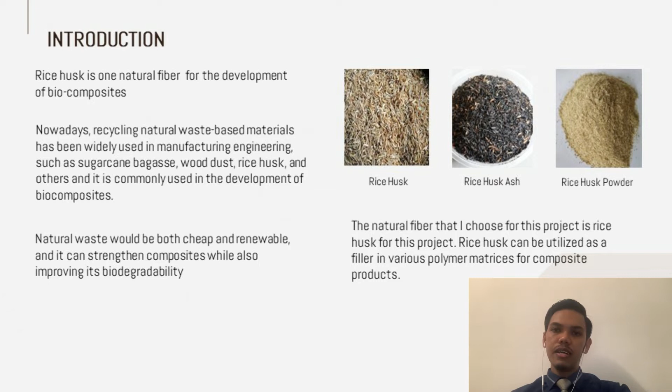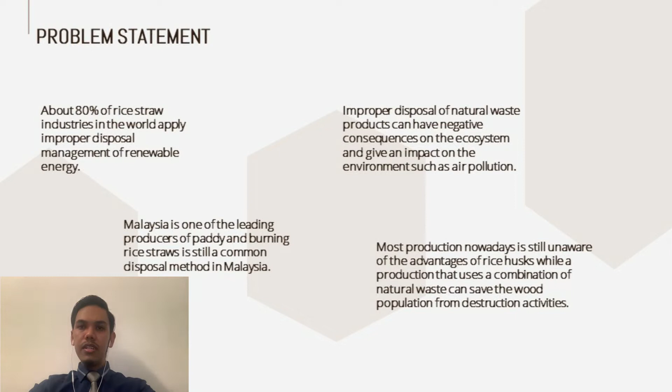And lastly, most production nowadays is still unaware of the advantages of rice husk, while production that uses a combination of natural waste can save the wood population from destruction activities.

Okay, next I will continue with the research objectives. The main objective for this project is to fabricate rice husk reinforced by epoxy resin with different ratios, divided into 3 ratios, which I will explain later in the scope of research. Next, to establish the standard size of specimen suitable for the mechanical testing, and lastly, to investigate the mechanical properties of rice husk reinforced by epoxy resin.

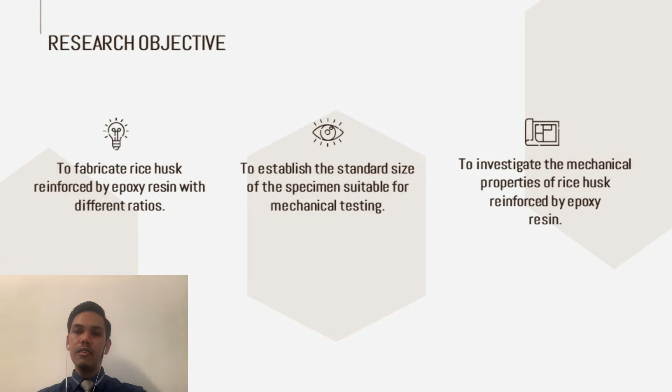Okay, next I will go for the scope of the research. The scope of the research is to fabricate the rice husk reinforced by epoxy resin, which I shorten to RHER, form the fabricated materials into testing specimens, and investigate the mechanical properties of the fabricated materials using tensile, flexure, and impact tests.

Next, the mixed composites were fabricated using the hand layup technique to produce 3 eco-friendly ratios: 60% rice husk and 40% epoxy, 65% rice husk and 35% epoxy, and lastly 70% rice husk and 30% epoxy.

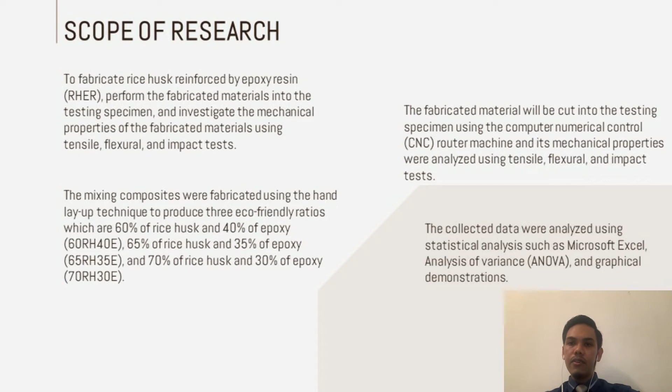The third scope is that the fabricated material will be cut into testing specimens using a computer numerical control (CNC) router machine, and its mechanical properties analyzed using tensile, flexure, and impact tests. And lastly, the collected data will be analyzed using statistical analysis such as Microsoft Excel, analysis of variance (ANOVA), and graphical

demonstration. Okay, these are some of the literature review findings related to my final year project topic. In this slide, I attached 4 different authors with their findings and research, and each of them shares the same result. The results state that impact strength and composite hardness increase steadily when using rice husk. Rice husk also has a significant contribution in improving mechanical properties.

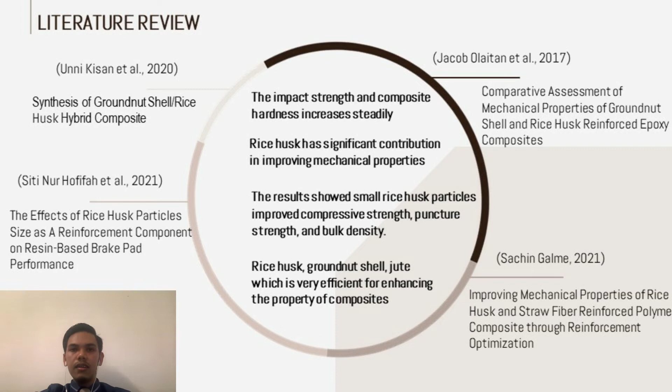The results also show small rice husk particles improve compressive strength, puncture strength, and bulk density. And lastly, rice husk, groundnut shell, and jute are very efficient for enhancing the properties of composites.

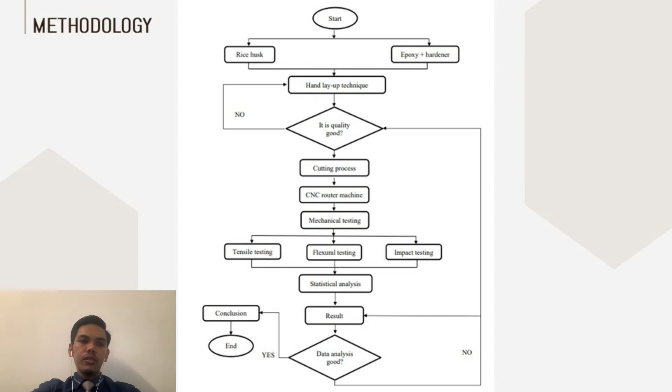Okay, next I will continue with the methodology, and in this slide I will show my process flowchart. Firstly, rice husk will be mixed with epoxy and hardener using the hand layup technique, and if the quality is good, we will proceed with the cutting process using the CNC router machine. Next, we will go for mechanical testing, divided into tensile testing, flexural testing, and impact testing, and we do some statistical analysis. If the data analysis is good, we will go for the conclusion and end the process.

For the tensile samples, we will use a universal testing machine in accordance with ASTM D3039, with 120 mm by 20 mm and 3 mm thickness. The quantity for tensile samples will be 15 samples for the 3 ratios. Next, for flexural samples, we also use a universal testing machine in accordance with ASTM D790, with 120 mm by 20 mm and 3 mm thickness. We will also produce 15 pieces for the 3 ratios.

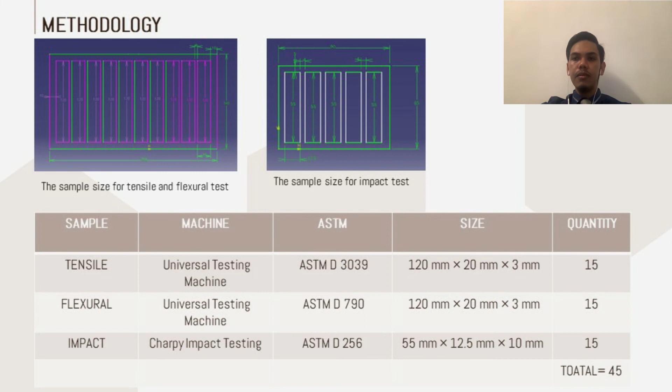And finally, for impact samples, we will use Charpy impact testing in accordance with ASTM D256, with 55 mm by 12.5 mm and 10 mm thickness. The samples for the 3 ratios will be 15 samples. The total will be 45 samples.

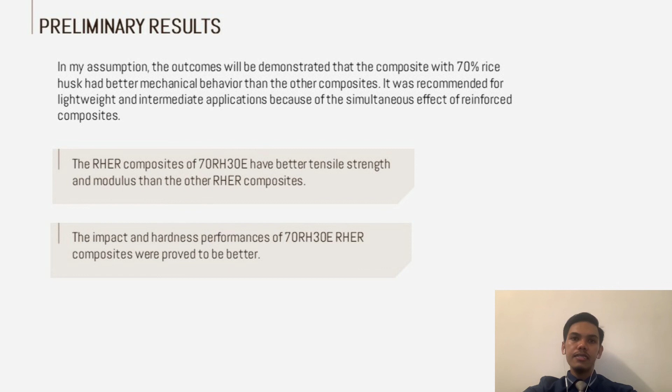Okay, for the preliminary result, in my assumption, the outcomes will demonstrate that the composite with 70% rice husk has better mechanical behavior than the other composites. It is recommended for lightweight and intermediate applications because of the simultaneous effect of the reinforced composite. In this slide, I stated that 70% rice husk will be better in tensile strength and modulus than the other composites. I also state that the impact and hardness performance of the 70% rice husk composite will prove to be better than the other composites.

Finally, we go for the conclusion. To achieve all the project goals, all of these procedures and preparations must be completed correctly and in accordance with the process planning. Every plan, approach, and preparation will have a considerable impact on achieving the desired outcomes and results by the end of this chapter. And finally, all the methods must be followed exactly and without error in order to achieve good results from this test. I think that's all from me.